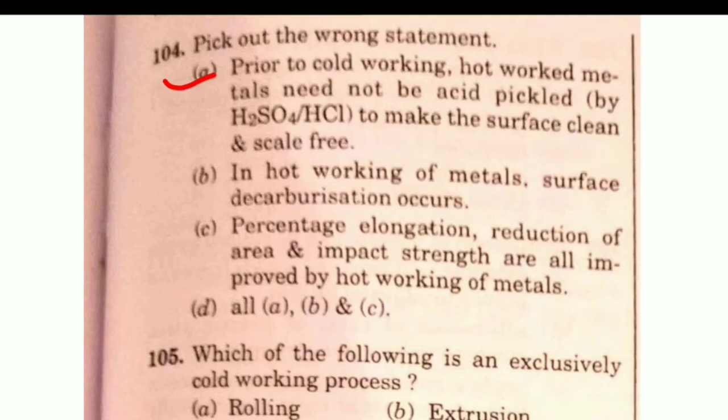Next है, which of the following is an exclusively cold working process? Rolling, extrusion, स्पिनिंग या डीप ड्रॉइंग। सही आंसर है ऑप्शन डी, डीप ड्रॉइंग। Which of the following is an exclusively cold working process? डीप ड्रॉइंग।

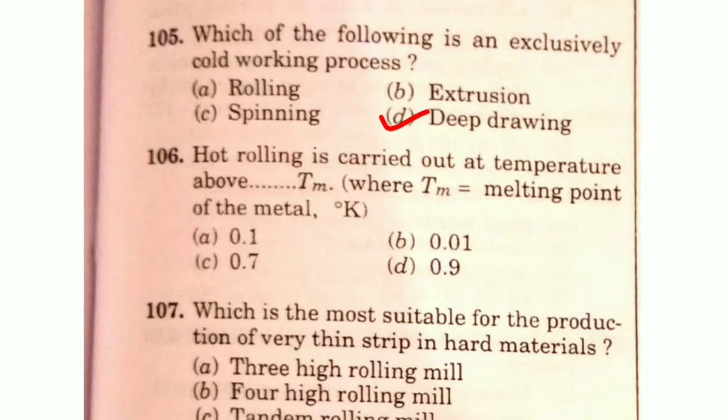Next है दोस्तों, hot rolling is carried out at temperature above dash Tm, where Tm is equals to melting point of the metal, डिग्री केल्विन। सही आंसर है ऑप्शन सी, 0.7 Tm। Hot rolling is carried out at temperature above 0.7 Tm, where Tm is equals to melting point of the metal।

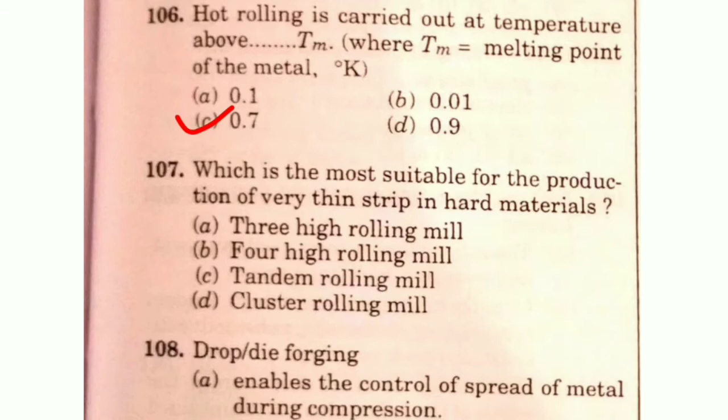Next, which is the most suitable for the production of very thin strip in hard material? 3 high rolling mill, 4 high rolling mill, tandem rolling mill या cluster rolling mill। सही आंसर है ऑप्शन डी, क्लस्टर रोलिंग मिल। Which is the most suitable for the production of very thin strip in hard material? ऑप्शन डी, क्लस्टर रोलिंग मिल।

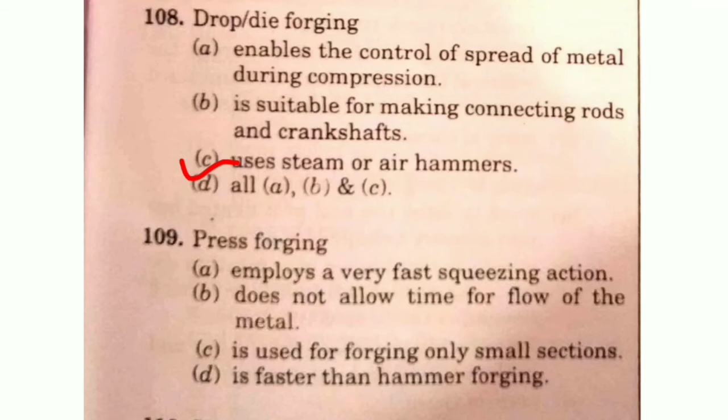नेक्स्ट है, drop and die forging enables the control of spread of metal during compression, is suitable for making connecting rods and crankshaft, या uses steam or air hammer, या ऑल ऑफ एबव। सही आंसर है ऑप्शन डी, all of above। Drop and die forging enables the control of spread of metal during compression, is suitable for making connecting rods and crankshaft, and uses steam or air hammer।

Next है, press forging employ a very fast squeezing action, does not allow time for flow of the metal, is used for forging only small section, या is faster than hammer forging। सही आंसर है ऑप्शन डी, is faster than hammer forging। Press forging is faster than hammer forging।

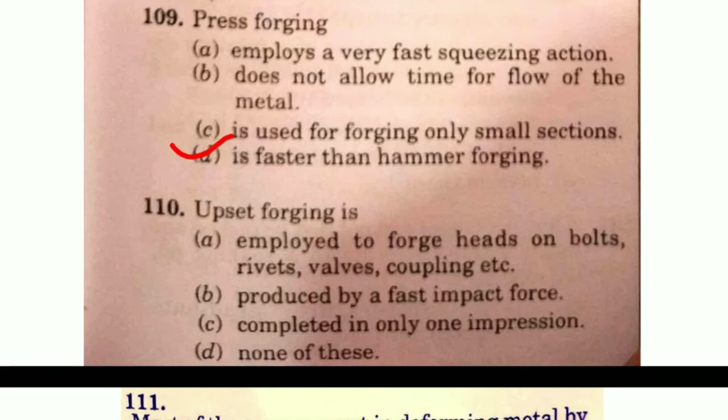नेक्स्ट है दोस्तों, upset forging is employed to forge heads on bolts, rivets, valves and coupling etc., या produced by a fast impact force, या completed in only one impression, या none of these। सही आंसर है ऑप्शन ए, employed to forge heads on bolts, rivets, valves, coupling etc. Upset forging is employed to forge heads on bolts, rivets, valves, coupling etc.

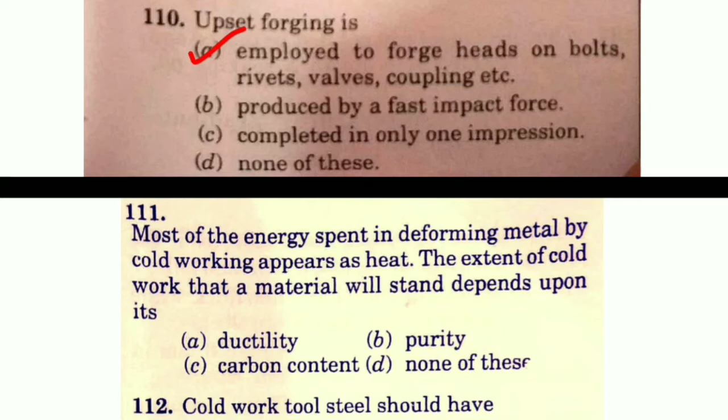Next है, most of the energy spent in deforming metal by cold working appear as heat। The extent of cold work that a material will stand depend upon its ductility, purity, carbon content, या none of these। सही आंसर है ऑप्शन ए, ductility। Most of the energy spent in deforming metal by cold working appear as heat। The extent of cold work that a material will stand depend upon its ductility।

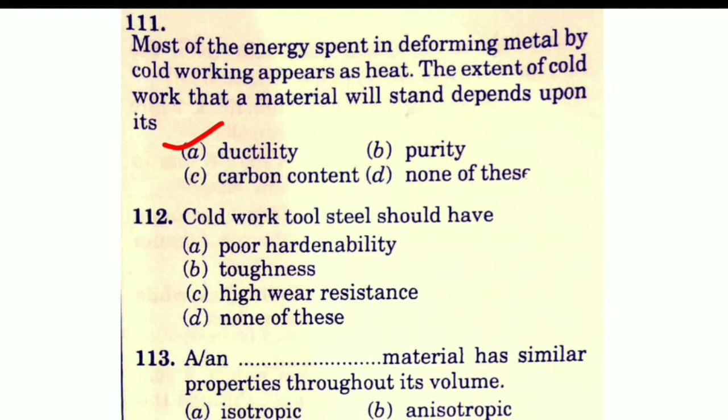नेक्स्ट है दोस्तों, cold work tool steel should have poor hardenability, toughness, high wear resistance, या none of these। सही आंसर है ऑप्शन सी, high wear resistance। Cold work tool steel should have high wear resistance।

A dash material has similar properties throughout its volume। Isotropic, anisotropic, homogeneous, या continuous। सही आंसर है ऑप्शन सी, homogeneous। A homogeneous material has similar properties throughout its volume।

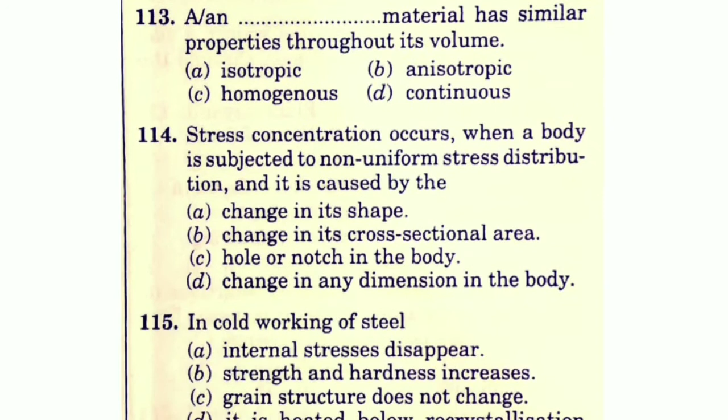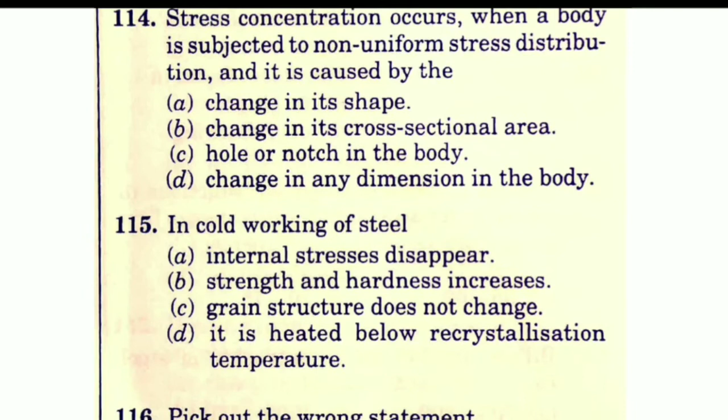Next दोस्तों, stress concentration occur when a body is subjected to non-uniform stress distribution and it is caused by the change in its shape, change in its cross-sectional area, hole or notch in the body, या change in any dimension in the body। सही आंसर है दोस्तों ऑप्शन सी, hole or notch in the body। Stress concentration occurs when a body is subjected to non-uniform stress distribution and it is caused by the hole or notch in the body।

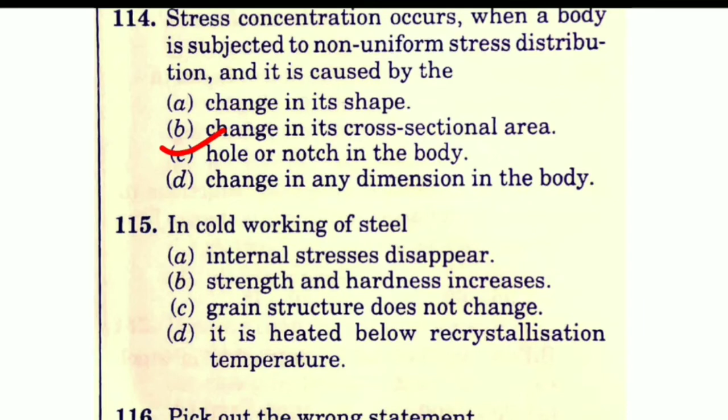Next, in cold working of steel, internal stress disappear, strength and hardness increase, grain structure does not changes, या it is heated below recrystallization temperature। सही आंसर है ऑप्शन बी, strength and hardness increase। In cold working of steel, strength and hardness increased।

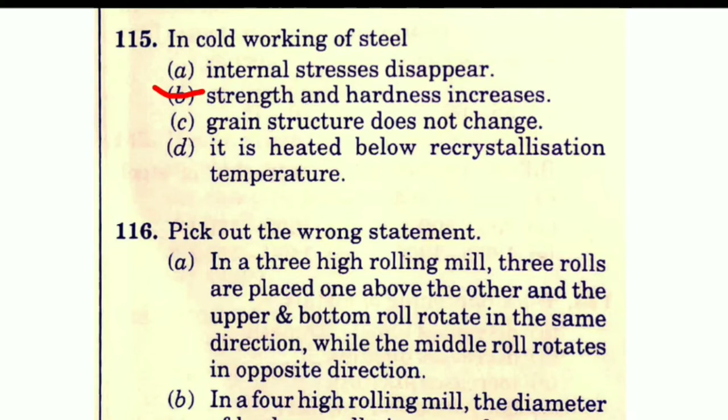Next, pick out the wrong statement। In a 3 high rolling mill, 3 rolls are placed one above the other, and the upper and bottom roll rotate in the same direction while the middle roll rotates in the opposite direction।

In a 4 high rolling mill, the diameter of backup rolls is more than that of working roll. Both the rolls of a 2 high rolling mill rotate at the same speed and in the same direction, and both rolls are the same diameter. The correct answer is option C, meaning this is the wrong statement: both rolls of a 2 high rolling mill rotate at the same speed and in the same direction.

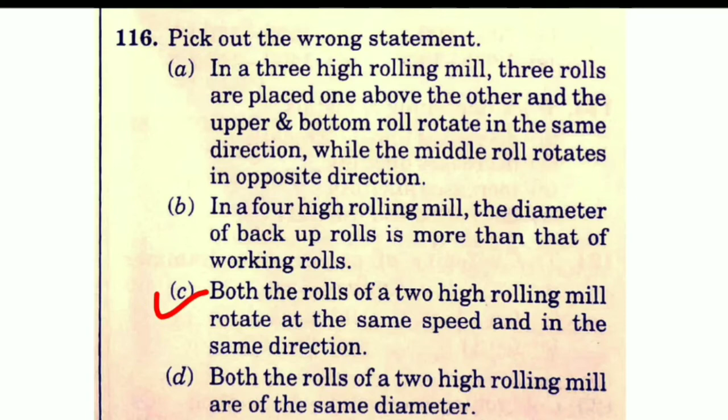During hot working of metal: porosity is almost eliminated, scale is formed on the metal surface, or mechanical properties improve due to refinement of grain structure, or all of the above. The correct answer is option D, all of the above. During hot working of metals, porosity is almost eliminated, scale is formed on the metal surface, and mechanical properties improve due to refinement of grain structure.

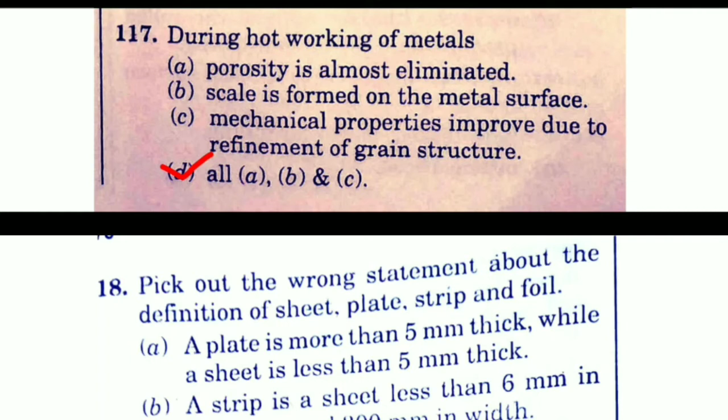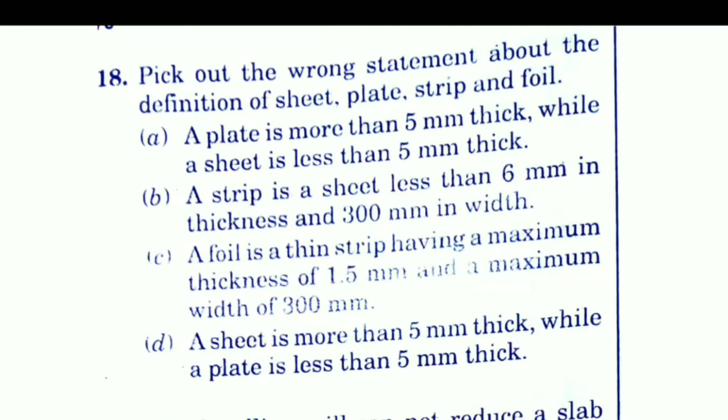Pick out the wrong statement about the definition of a sheet, plate, strip or foil. A plate is more than 5mm thick while a sheet is less than 5mm thick. A strip is a sheet less than 6mm in thickness and 300mm in width. A foil is a thin strip having a maximum thickness of 1.5mm and a maximum width of 300mm. Option D: a sheet is more than 5mm thick while a plate is less than 5mm thick. The correct answer is option D, which figures out the wrong statement about the definition of sheet, plate, strip and foil: a sheet is more than 5mm thick while a plate is less than 5mm thick.

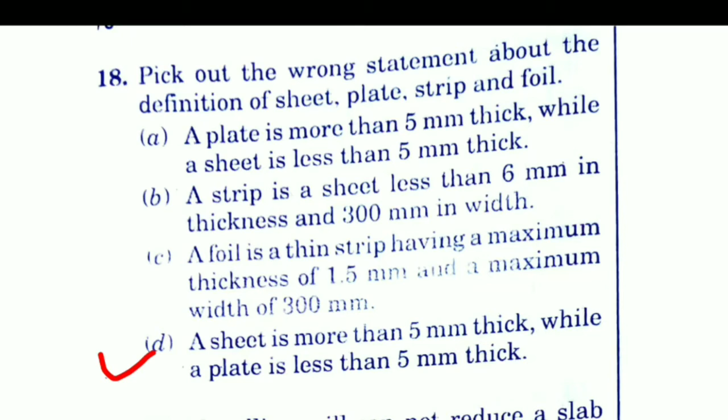Which rolling mill cannot reduce a slab directly to strip in one pass through the mill: cogging mill, planetary mill, 3 high mill, or none of these? The correct answer is option C, 3 high mill. Which rolling mill cannot reduce a slab directly to strip in one pass through the mill? The correct answer is option C, 3 high mill.

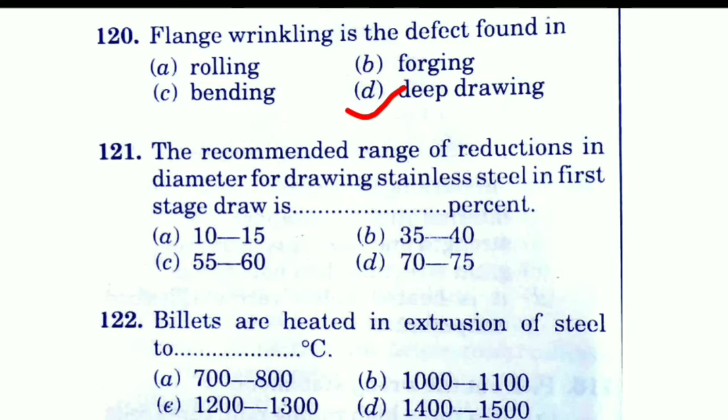Flange wrinkling is the defect found in: rolling, forging, bending, or deep drawing. The correct answer is option D, deep drawing. Flange wrinkling is the defect found in deep drawing.

The recommended range of reduction in diameter for drawing stainless steel in the first stage draw is what percentage? The correct answer is option B, 35 to 40%. The recommended range of reduction in diameter for drawing stainless steel in the first stage draw is 35 to 40%.

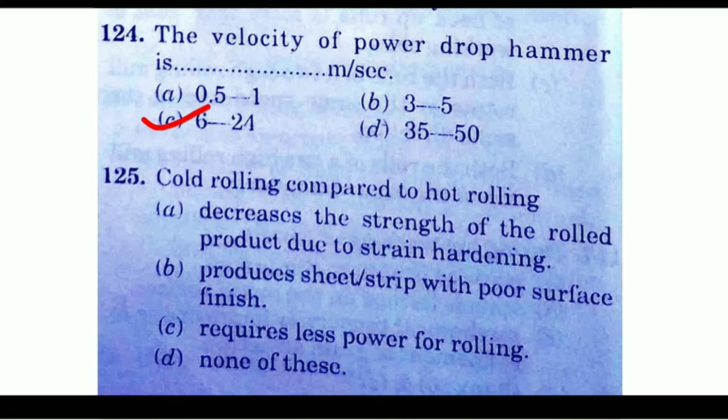Cold rolling compared to hot rolling: decreases the strength of the rolled product due to strain hardening, produces sheets or strip with poor surface finish, requires less power for rolling, or none of these. The correct answer is option A, decrease the strength of the rolled product due to strain hardening. Cold rolling compared to hot rolling decreases the strength of the rolled product due to strain hardening.

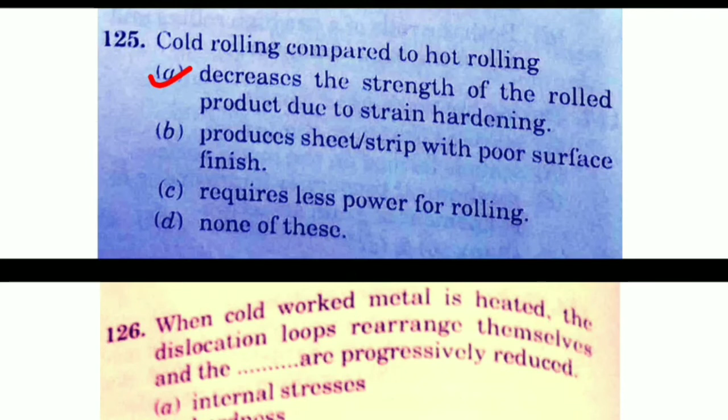When cold worked metal is heated, the dislocation loops rearrange themselves and the following are progressively reduced: internal stress, hardness, electrical, or all of A, B and C. The correct answer is option D, all of A, B and C. When cold worked metal is heated, the dislocation loops rearrange themselves and internal stress, hardness and electrical properties are progressively reduced.

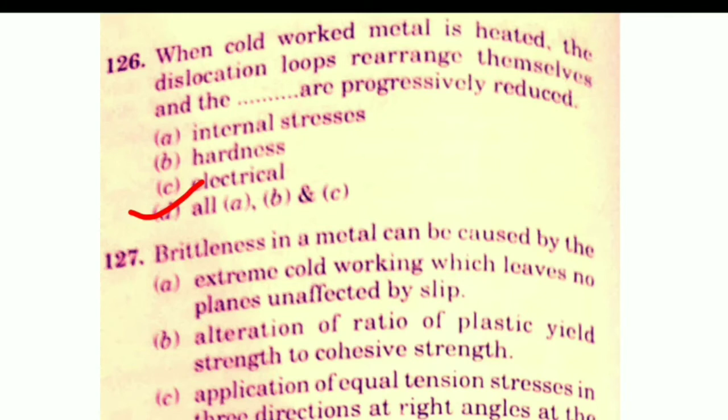Brittleness in a metal can be caused by: extreme cold working which leaves no planes unaffected by slip, alteration of ratio of plastic yield strength to cohesive strength, application of equal tension stress in three directions at right angles at the same time, or all of the above. The correct answer is option D, all of the above. Brittleness in a metal can be caused by extreme cold working which leaves no planes unaffected by slip, alteration of ratio of plastic yield strength to cohesive strength, and application of equal tension stress in three directions at right angles at the same time.

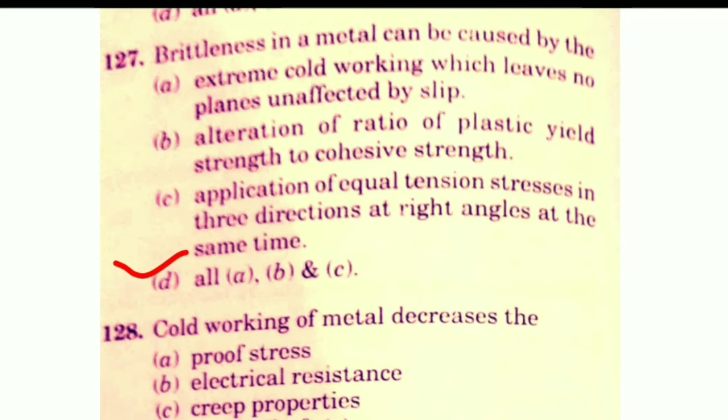Cold working of metal decreases: proof stress, electrical resistance, creep properties, or all of A, B and C. The correct answer is option C, creep properties. Cold working of metal decreases the creep properties.

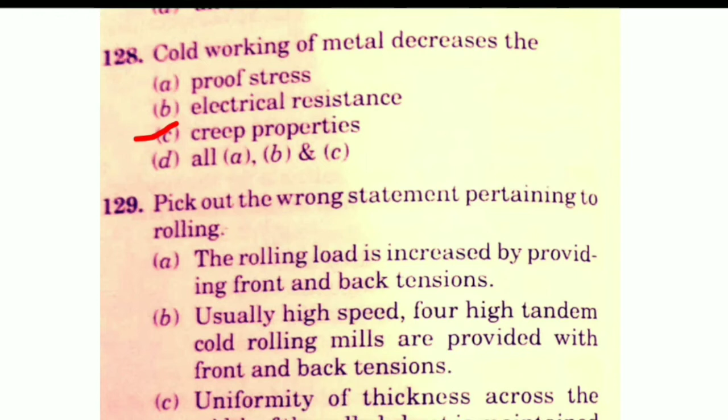Pick out the wrong statement pertaining to rolling: the rolling load is increased by providing front and back tension; usually high speed tandem cold rolling mills are provided with front and back tension.

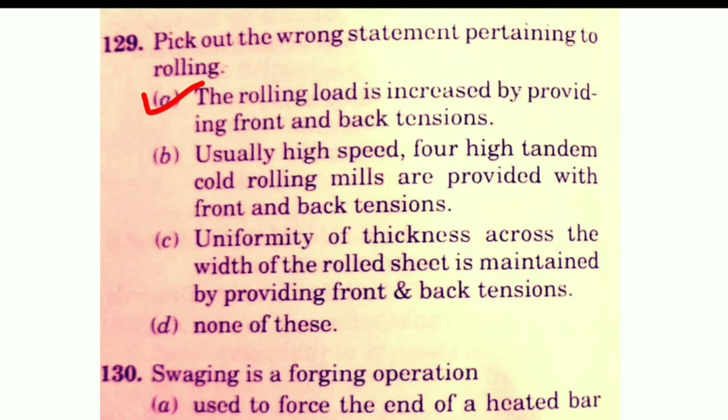Uniformity of thickness across the width of the rolled sheet is maintained by providing front and back tension. The correct answer is option A. Pick out the wrong statement pertaining to rolling: Option A, the rolling load is increased by providing front and back tension.

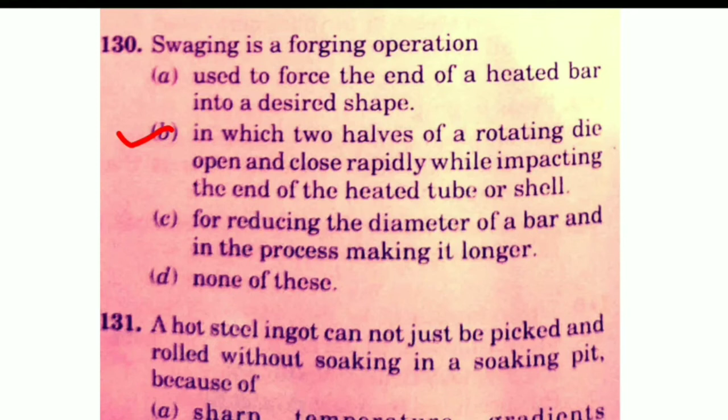Next: Swaging is a forging operation used to force an end of a heated bar into a desired shape, in which two halves of a rotating die open and close rapidly while impacting the end of the heated tube or shell, for reducing the diameter of a bar and in the process making it longer. The correct answer is option B: in which two halves of a rotating die open and close rapidly while impacting the end of the heated tube or shell.

Next: A hot steel ingot cannot just be picked and rolled without soaking in a soaking pit because of sharp temperature gradients throughout the ingot, its big size, high power consumption in rolling it, or none of these. The correct answer is option A: sharp temperature gradients throughout the ingot.

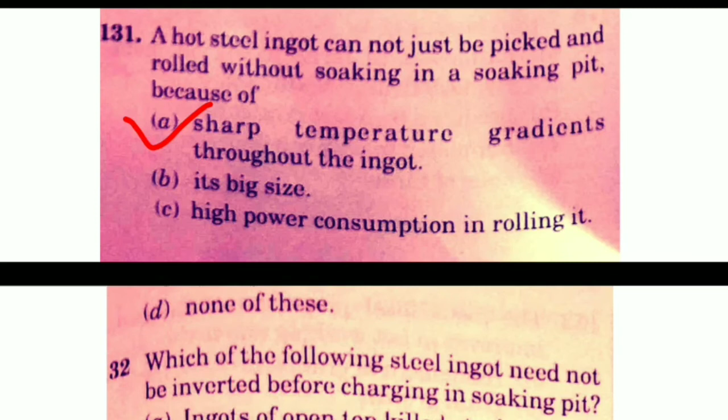Which of the following steel ingot needs not be inverted before charging in soaking pit? Ingot of open top killed steel ingot, semi killed steel ingot, rimming steel ingot, or none of these. The correct answer is option C, rimming steel ingot.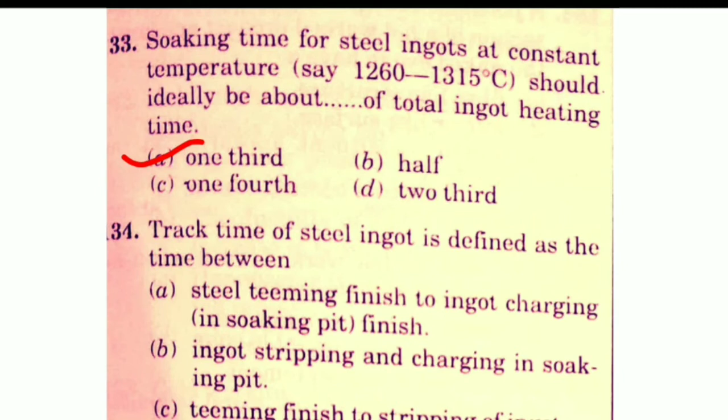Next: Track time of steel ingot is defined as the time between steel teeming finish to ingot charging finish, or ingot stripping and charging in soaking pit, or teeming finish to stripping of ingot, or none of these. The correct answer is option A: steel teeming finish to ingot charging finish.

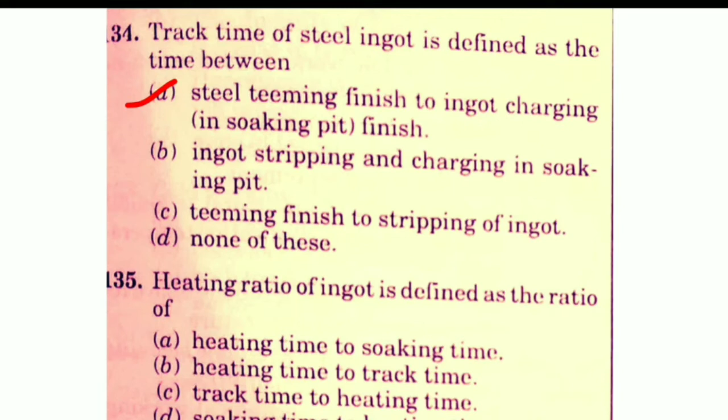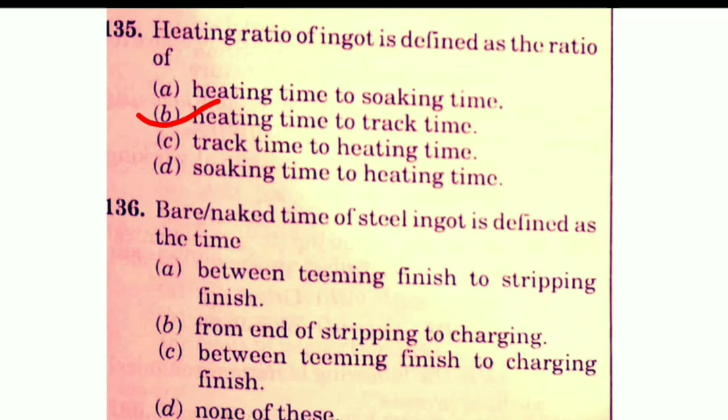Next: Heating ratio of ingot is defined as the ratio of heating time to soaking time, heating time to track time, track time to heating time, or soaking time to heating time. The correct answer is option B, heating time to track time.

Next: Bare or naked time of steel ingot is defined as the time between teeming finish to stripping finish, from end of stripping to charging, between teeming finish to charging finish, or none of these. The correct answer is option B: from end of stripping to charging.

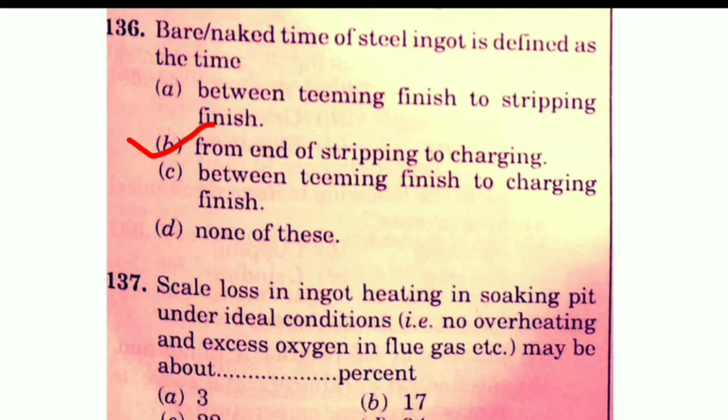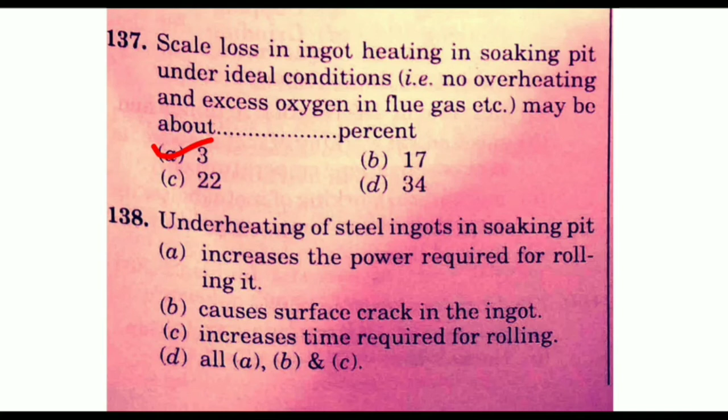Next: Scale loss in ingot heating in soaking pit under ideal condition, that is no overheating and excess oxygen in flue gas etc., may be about what percent - 3, 17, 22, or 34? The correct answer is option A, 3%.

Next: Under heating of steel ingot in soaking pit - increases the power required for rolling it, causes surface crack in the ingot, or increases time required for rolling, or all A, B and C. The correct answer is option D, all A, B and C.

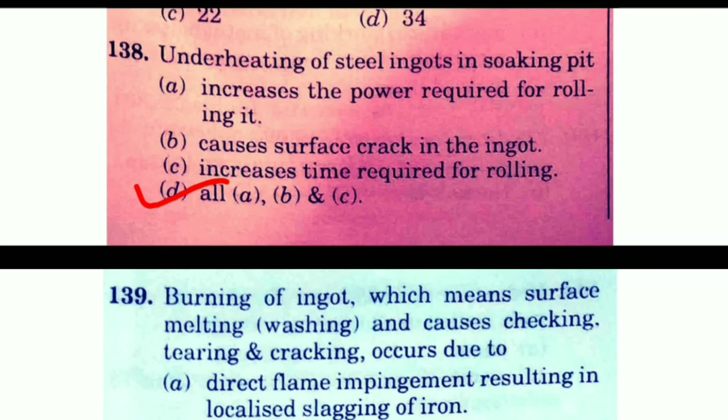Next: Burning of ingot, which means surface melting and causes checking, tearing and cracking, occurs due to direct flame impingement resulting in localized slagging of iron, presence of inclusion or low melting element in steel, or fast rate of heating particularly of cold ingot, or all A, B and C.

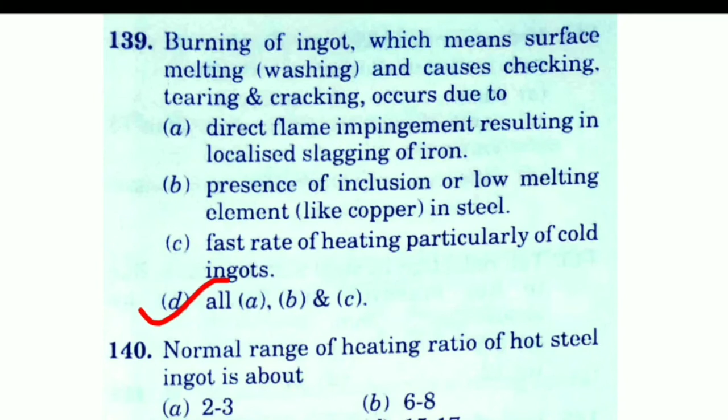Sahi answer hai option D, all A, B and C. Burning of ingot, which means surface melting and causes cracking and tearing, occurs due to direct flame impingement resulting in localized slagging of iron, presence of inclusion or low melting element in steel, or fast rate of heating particularly of cold ingot.

Next question: normal range of heating ratio of hot steel ingot is about. Sahi answer hai option A, 2 to 3. Normal range of heating ratio of hot steel ingot is about 2 to 3.

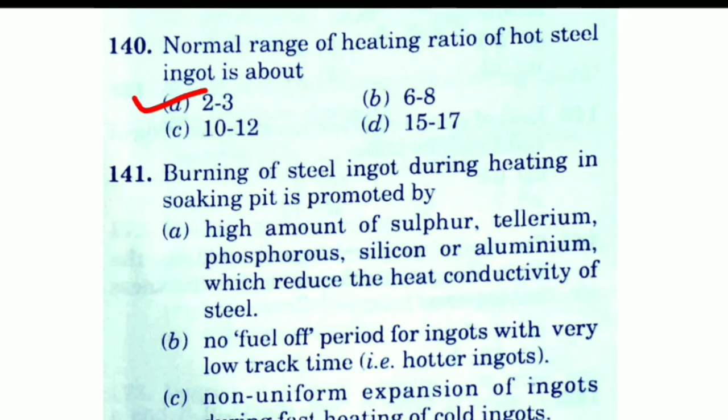Burning of steel ingot during heating in soaking pit is promoted by high amount of sulfur, tellurium, phosphorus, silicon or aluminium, which reduce the heat conductivity of steel, no fuel off period for ingot with very low track time that is hotter ingot, a non-uniform expansion of ingots during fast heating of cold ingot, or all of A, B and C. Sahi answer hai option D, all A, B and C.

Burning of steel ingot during heating in soaking pit is promoted by high amount of sulfur, tellurium, phosphorus, silicon or aluminium, which reduce the heat conductivity of steel. No fuel off period for ingot with very low track time, that is hotter ingot, and non-uniform expansion of ingots during fast heating of cold ingot.

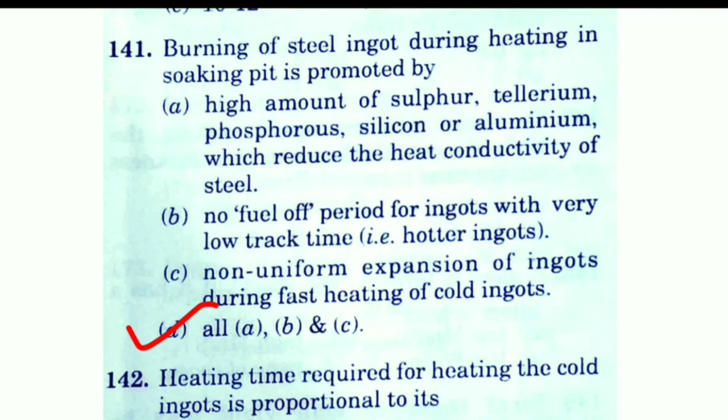Next: heating time required for heating the cold ingot is proportional to its charging temperature, track time, size, or shape. Sahi answer hai option C, size. Heating time required for heating the cold ingot is proportional to its size.

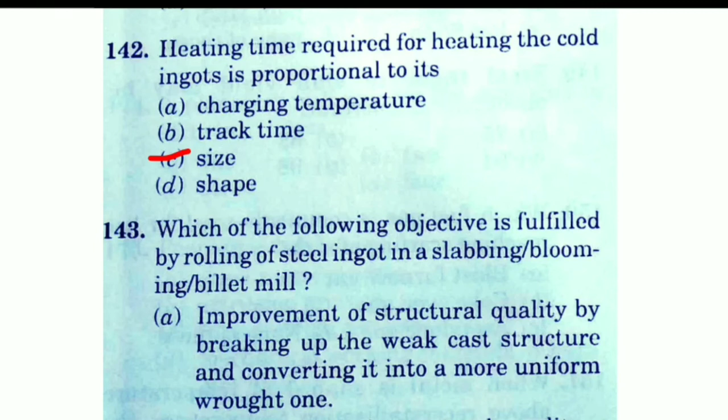Next, which of the following object is fulfilled by rolling of steel ingot in a slabbing, blooming or billet mill? A: improvement of structural quality by breaking up the weak cast structure and converting it into a more uniform wrought one. B: improvement of structural quality, scaling off and rolling out of minor surface defect and surface conditioning while still hot immediately after rolling, by not machine scarfing. C: improvement of internal quality, cropping of piped heavily segregated ingot top and also lowermost bottom part after the semi-finished section is rolled, welding of blowholes. Or D, all A, B and C. Sahi answer hai option D, all A, B and C.

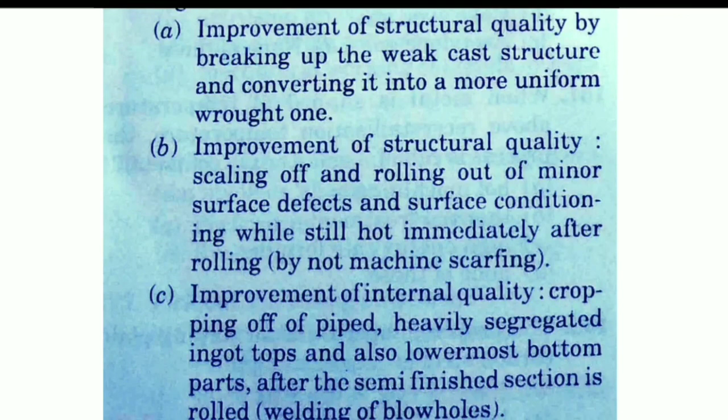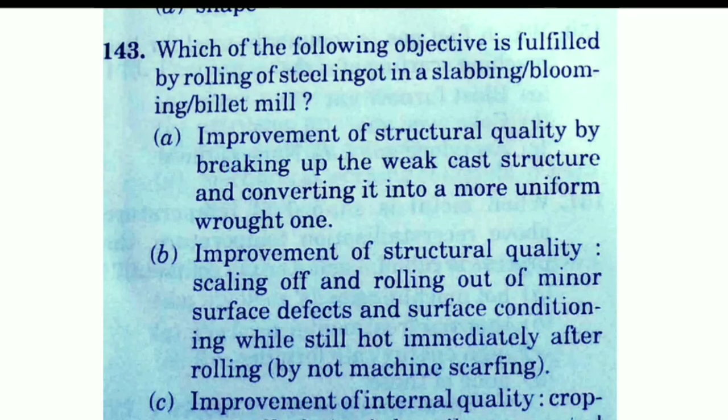Which of the following objective is fulfilled by rolling of steel ingot in a slabbing, blooming, billet mill? A: improvement of structural quality by breaking up the weak cast structure and converting it into a more uniform wrought one. B: improvement of structure quality, scaling off rolling out of minor surface defect and surface conditioning while still hot immediately after rolling. C: improvement of internal quality, cropping of piped heavily segregated ingot tops and also lowermost bottom parts after the semi-finished section is rolled. Sahi answer hai all of above, option D.